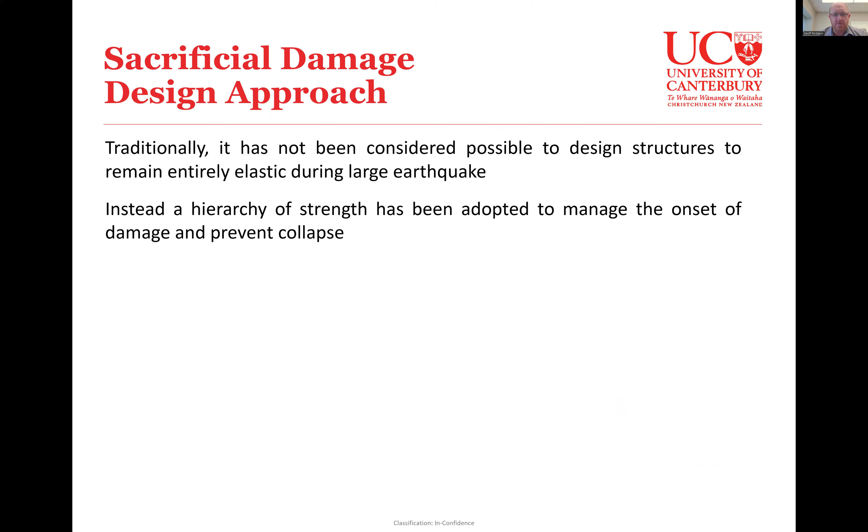We have traditionally adopted the sacrificial design approach. It's been used fairly widely worldwide, really based on the hierarchy of strength, capacity design, and protecting the columns through the formation of a hinge in the beams—something I'm sure you're all well aware of.

But certainly in the wake of the earthquakes in Christchurch, when you had engineers going to the media and doing interviews saying that this is the type of damage we would expect to see in an earthquake, that gave the public cause for concern. It's very clear there's a significant disparity between the way we've traditionally designed buildings and what the public actually expects of the performance of their infrastructure.

Separate to what I'm talking about today, there's also a separate project, funded by our state earthquake insurer in New Zealand, Natural Hazards Commission Toka Tū Ake, looking at society's perception and expectations of building performance. That quantifies and supports this disparity between what the public expects from our buildings and what we tend to actually be offering in a lot of cases.

This was Christchurch a few years after the earthquake, so there's a significant amount of demolition there.

It was around about 40 billion New Zealand dollars, so about 25 billion US dollars. The city suffered from it - it's a city with a population of about 400,000. There are lots of things that contributed to this, insurance penetration and all sorts of contributing factors, but a significant amount of the CBD was demolished.

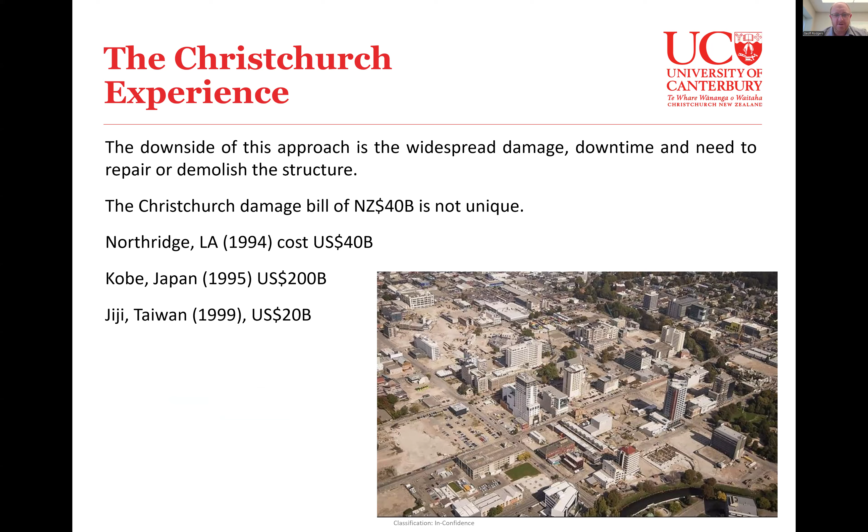So obviously the onset of damage and that sort of second response regime that occurs from sacrificial damage has a lot of advantages. It reduces the stiffness, lengthens the period of vibration, which then moves to generally a lower period of demand on the response spectra, reduces accelerations, and absorbs energy. But obviously the structure may not recenter, leading to significant downtime and cost.

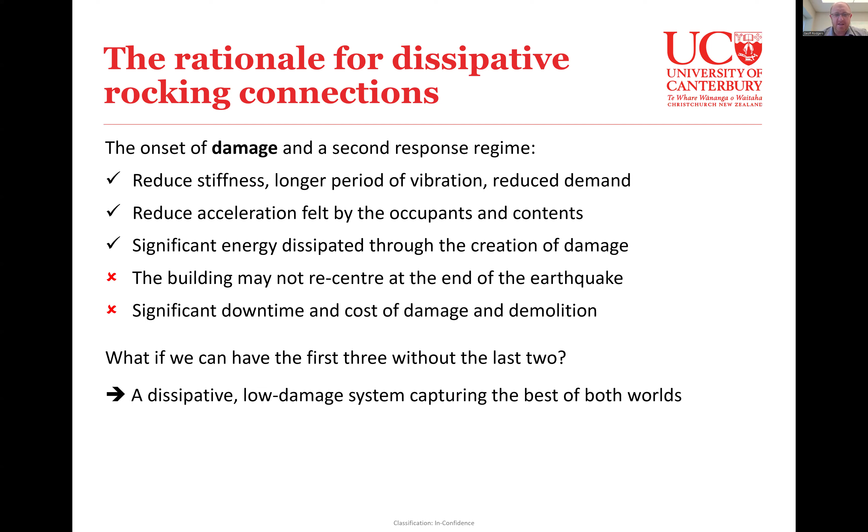So that has motivated a lot of work done in New Zealand and internationally around jointed rocking connections and the ability to provide, whether it be base isolation or like the PRESSS systems - the jointed precast concrete systems - really ways of providing some sort of controlled motion rather than through the formation of damage.

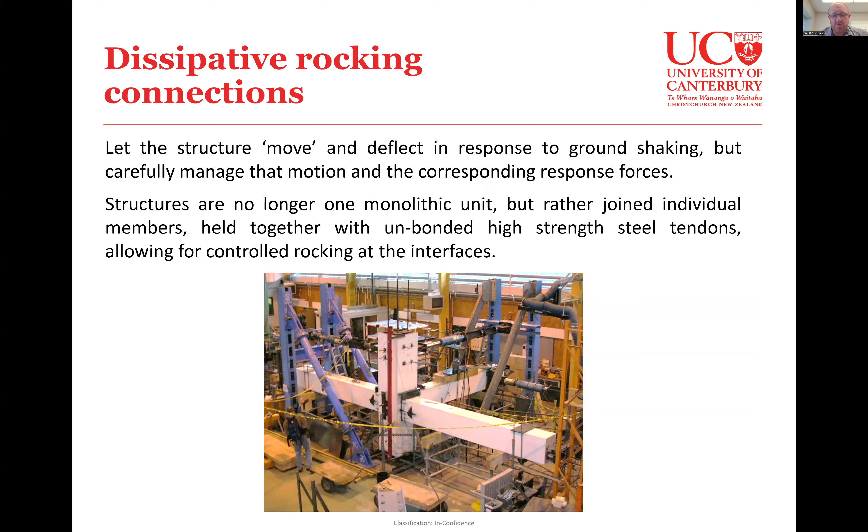So this was actually a large-scale structural test. It's just an external beam column joint that was used to simulate the connections, and this was actually part of my PhD - so this is going back nearly 20 years now. A small amount of gap opening occurred there, and obviously it has significant impact in terms of how the building interacts with the earthquake.

Now you can see, I'm sure if you can see my pointer, there is a steel tendon which is unbonded to the concrete, clamping everything together, and above a certain level of demand you have this rocking. Now this particular connection is what we refer to as a tearing solution, and it does have a frame dilation issue. If there was a floor slab that ran continuously across that, it would induce a dilation effect on that floor slab. So there are some continuity issues with that particular design.

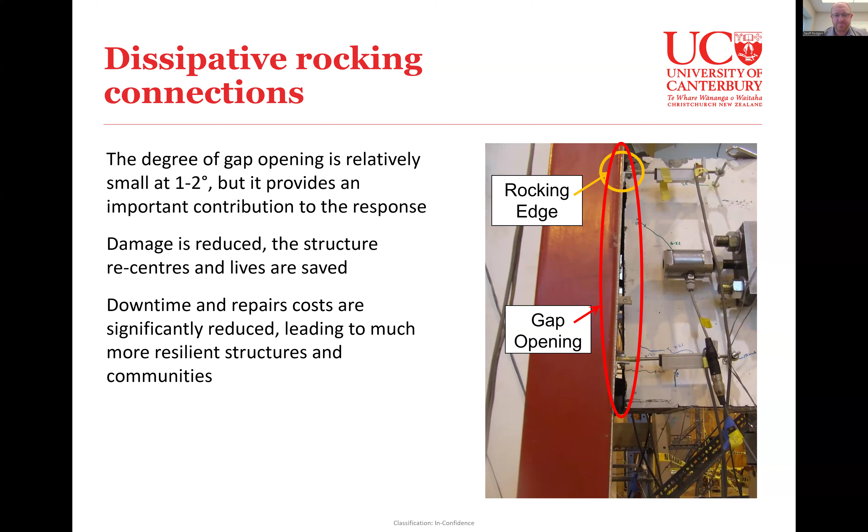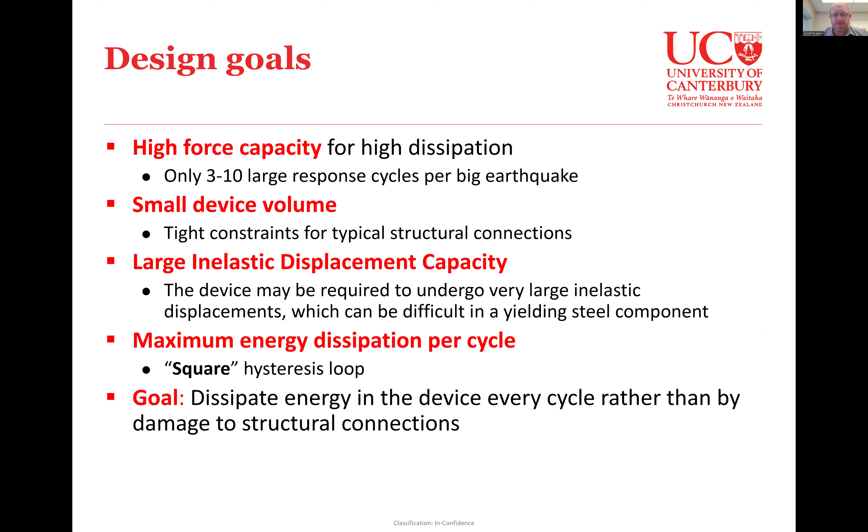And in that particular building and structural subassembly, what we looked at was a way of absorbing energy in that. So we wanted a high force capacity, a small device volume to fit directly into the jointed region. We wanted large inelastic displacement capacity, but we didn't want any stiffness or strength degradation or any low cycle fatigue concerns. So one thing we actually applied there was the concept of a lead extrusion damper.

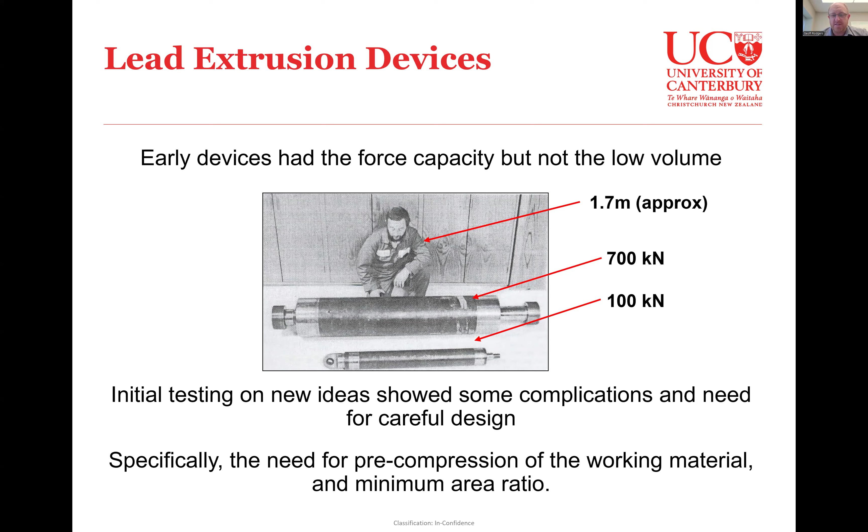So this is actually some photos from the 70s, and this was developed in New Zealand. It was the extrusion device, and these two devices - one was 700 kilonewtons, one 100 kilonewtons. They were quite long stroke devices for base isolation purposes.

And the principle behind them is that you have essentially either a bulged central shaft or a constricted outer tube. Regardless of how you do it, you're essentially creating an annular restriction, and you're plastically extruding a plug of solid lead backwards and forwards as you move the piston on the shaft relative to the outer cylinder. So much like making Play-Doh spaghetti, where you're extruding through that die, except you're doing it in a reversible way, and it's actually an annular orifice that you're using.

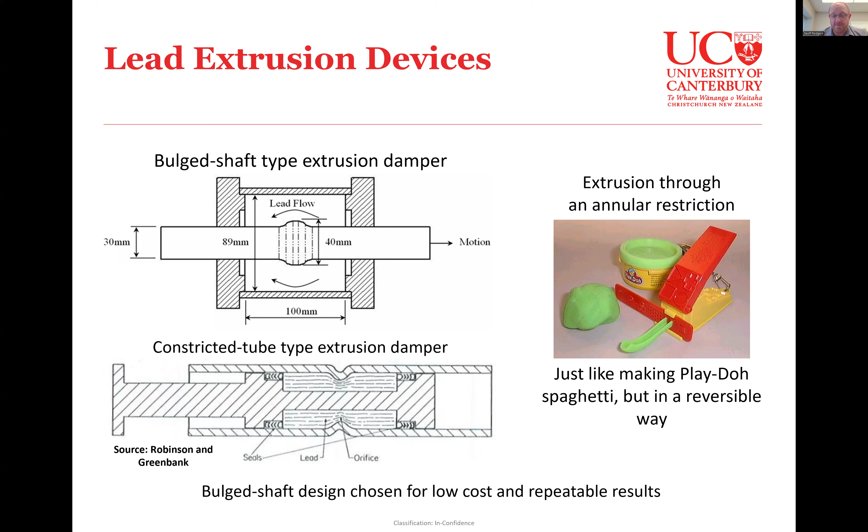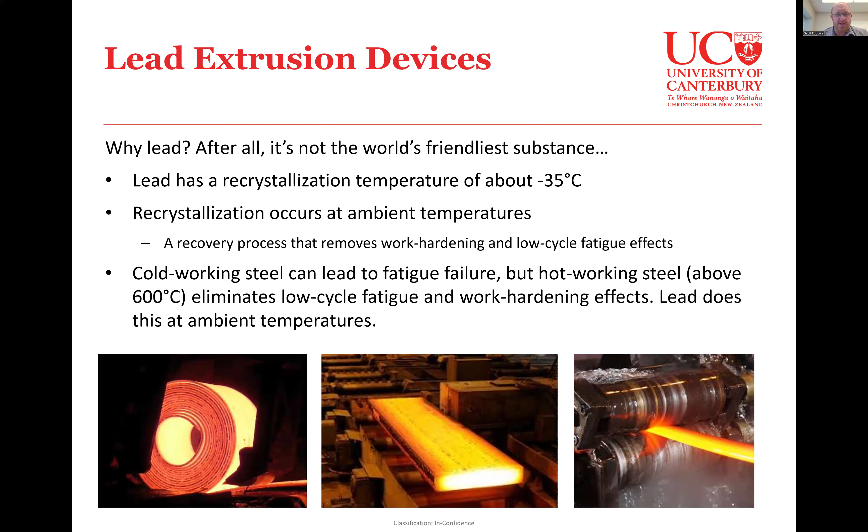So the question was, why do we use lead? It's not the world's friendliest substance - it obviously has some toxicity issues. Well, the key thing is that lead has a recrystallization temperature of about minus 35 Celsius. So when you're working this at ambient temperatures, it's essentially like hot working steel at 800 to 1,000 degrees Celsius - essentially you're not seeing any stiffness or strength degradation. The grain structure within the material is dynamically recovering, and that can all be done at room temperature, which is why lead has these unique rheological properties that make it a good candidate material.

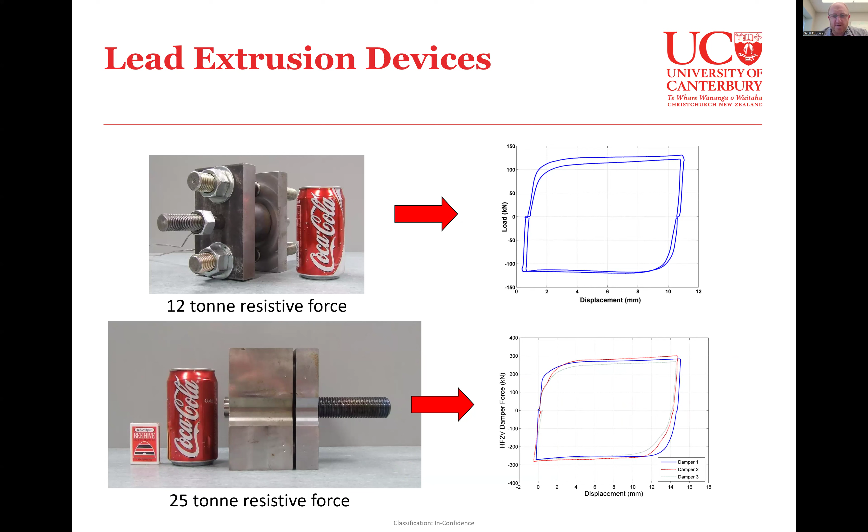So for those jointed connections, we made some devices here. They were 120 kilonewton - 12-ton resistive force in the top and 25-ton in the bottom. So when you put that in and pressurize the lead in there, you can actually get quite a significant amount of force capacity in a very small volume. So that's a very favorable aspect.

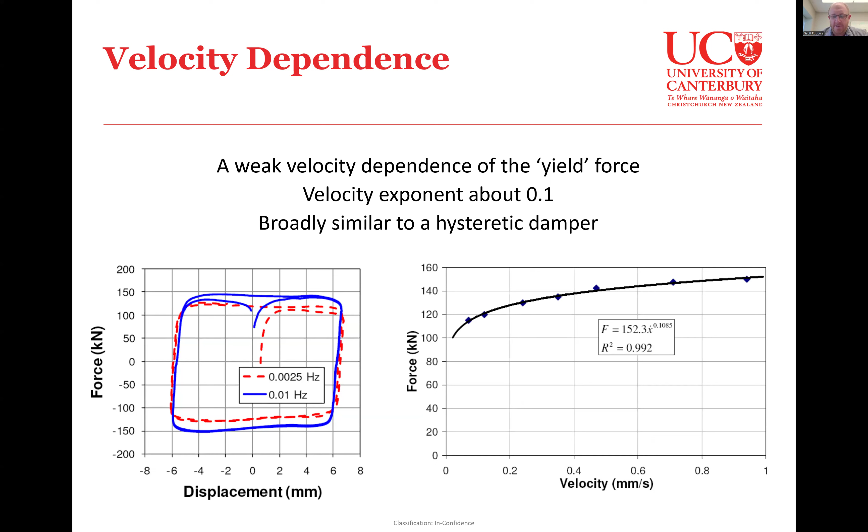The devices do have a slight velocity exponent, so they have a velocity dependence with a velocity exponent of about 0.1. In some ways they're broadly similar to a hysteretic damper, but they do have this sort of weak velocity dependence. Now with a velocity exponent of 0.1, there's not going to be a big force difference between two dynamic tests. But if you compare a quasi-static test to a dynamic test, which we have here, then there is a reasonable force difference. So what we have here is just the same device being tested in two different test machines - the inner blue loop was a quasi-static test, which was actually just a triangular wave.

The red loop was a dynamic test, which was actually a sine wave. While the force limit increases, the shape of the loop also changes, and that's traceable back to one being a triangular wave and one being a sine wave. So the blue one is essentially a constant velocity being put into it, and the red one is a varying velocity with displacement.

What you can see there is you're getting about 100 kilonewtons at 10 millimeters per minute, or about 0.16 millimeters per second, and then about 150 kilonewtons at 30 millimeters a second. So you're seeing about a 50% increase when you change this input velocity by about 160 times. So there is a velocity dependent component to these, but it is relatively weak.

Comparing a quasi-static to a dynamic test has quite a significant difference, but comparing between two quasi-static tests or between two dynamic tests is relatively minor changes.

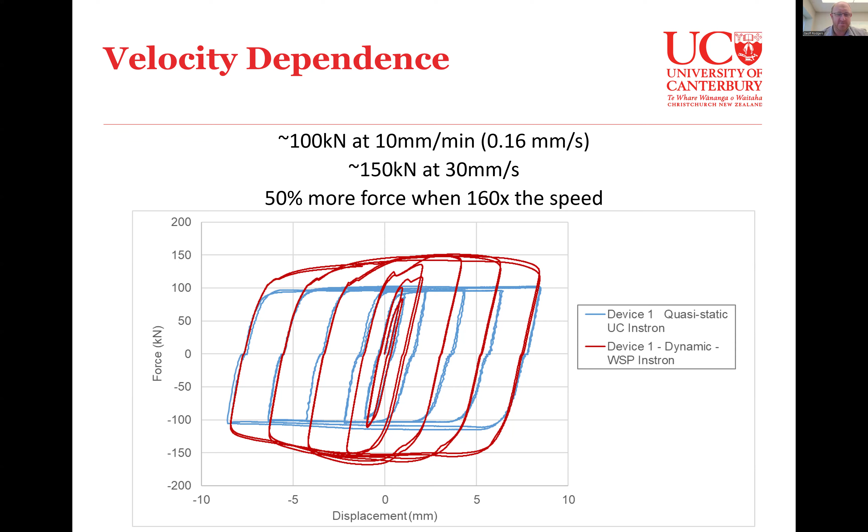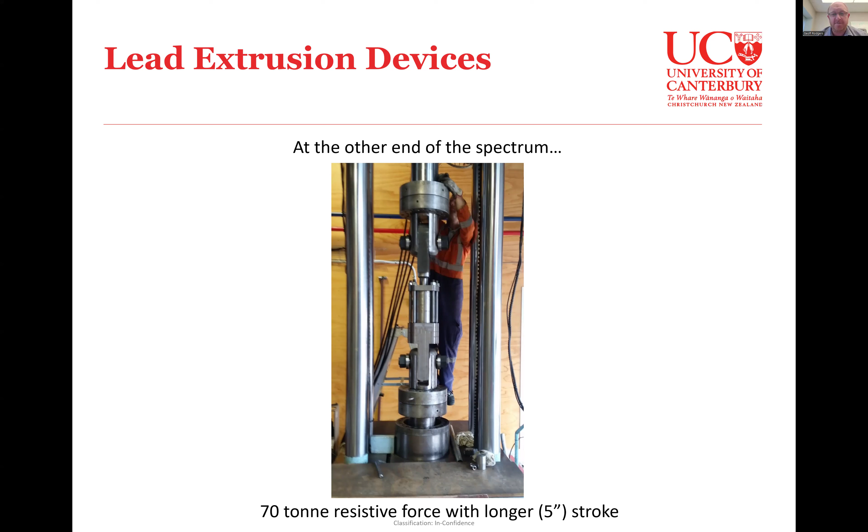Viscous fluid dampers, I'm sure you've all seen these — anything from a linear force velocity response to a nonlinear force velocity response, so they're fairly standard.

One thing we've also looked at is Ringfeder friction springs. These are an alternating taper — when you put an axial compression onto the stack of springs, the outer rings undergo a radial expansion, and the inner rings undergo a radial compression. In doing so, you get a very, very high stiffness spring. So you're turning this axial force into a radial reaction, and the stiffness of these springs can be orders of magnitude higher than you'd get from something like a coil spring. While coil springs are very useful for mechanical plant, they don't tend to have the stiffness useful on a structural scale — they don't have the ability to get the forces we need. That's why these are a favorable option.

Now, one thing we've done is look at a device here which is a combination of these. Looking at the diagram, the tube that sticks out on the right-hand side has ring springs located within it. It might look like it's in series, but those two elements are actually in parallel — they undergo the same displacement, and the forces in the two damping components, the viscous fluid component and the ring springs, actually add together to generate the total damping force.

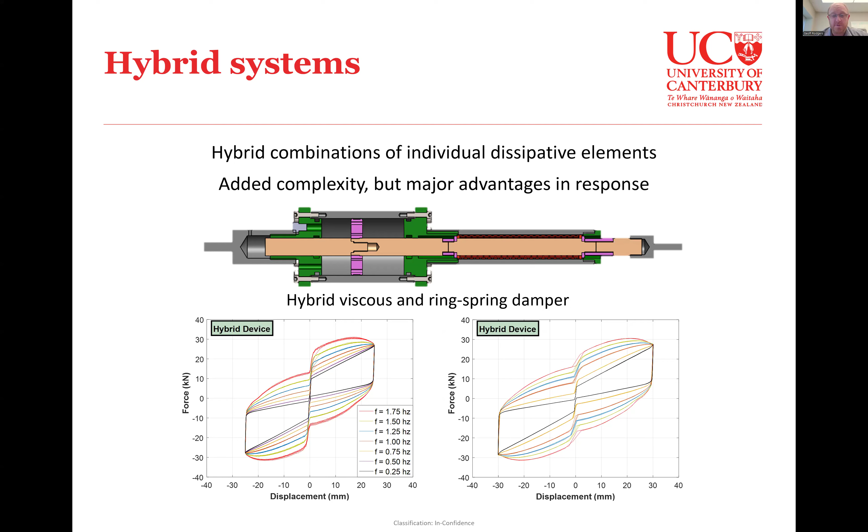So this is the device that results, and as you can see, as you go faster and faster, you get a much broader loop, and as you go slower and slower, you just revert back to the ring spring behavior as you saw on the previous page.

Another thing we've done is looking at custom quadrant damping. This is sort of born out of a lot of the semi-active device work, the resettable stiffness devices and the magneto and electrorheological devices. There's a huge body of work that's been done there, and I've actually worked previously on some resettable air dampers.

But the key thing is that the semi-active devices do have some complexity to them. So the question was, can we achieve that same broad type of behavior, but do it in an entirely passive way? So we don't have to have any computation, any sensors, any power requirement — we've just got a passive device that will produce that behavior.

The idea is that damping in specific quadrants of the force deflection plot may mean that we can provide damping to a structure without leading to an increase in the overall base shear. So in terms of peak axial forces in columns and the demand on the foundation, this has a potential advantage here.

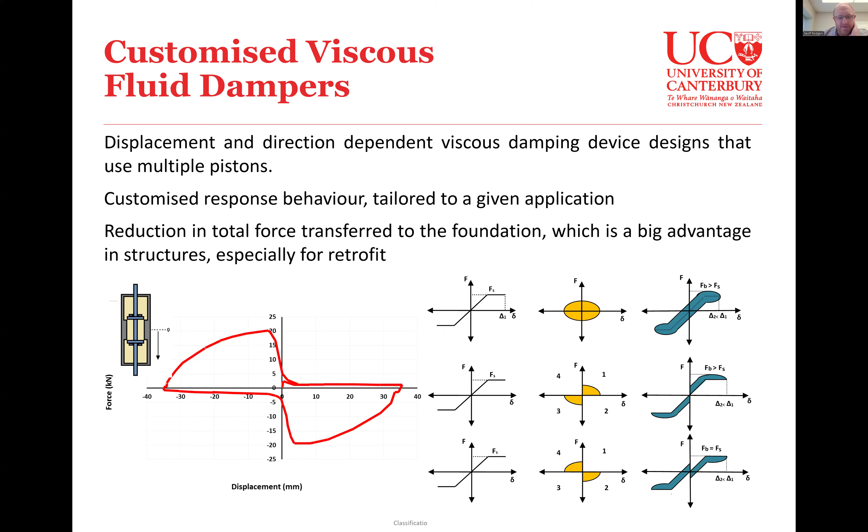This is the schematic for a linear elastic structure. The previous slide showed a bilinear elastic structure, which you might see for a rocking structure. If you've damped something to the point that you're largely within the linear elastic range, the idea is that you can reduce your displacements without increasing base shear. Depending how much you reduce structural displacements, you may see less total base shear in other cases too, which would further reduce the combined demand on the foundation.

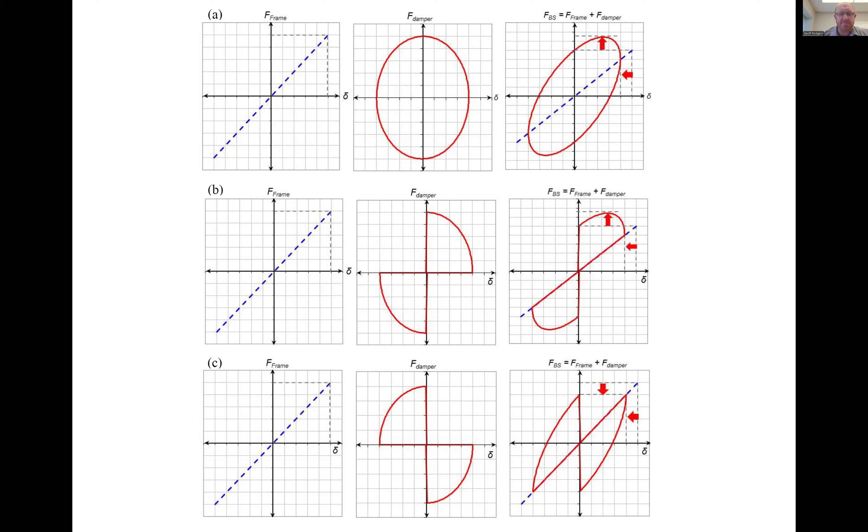So the question is how to achieve that. We've got a standard viscous damper fitted within a cylinder, so that's what that might look like. The first thing we did was put essentially a plate which covered some small inner orifices in the piston, and then a much larger ring around the outside with much larger orifices.

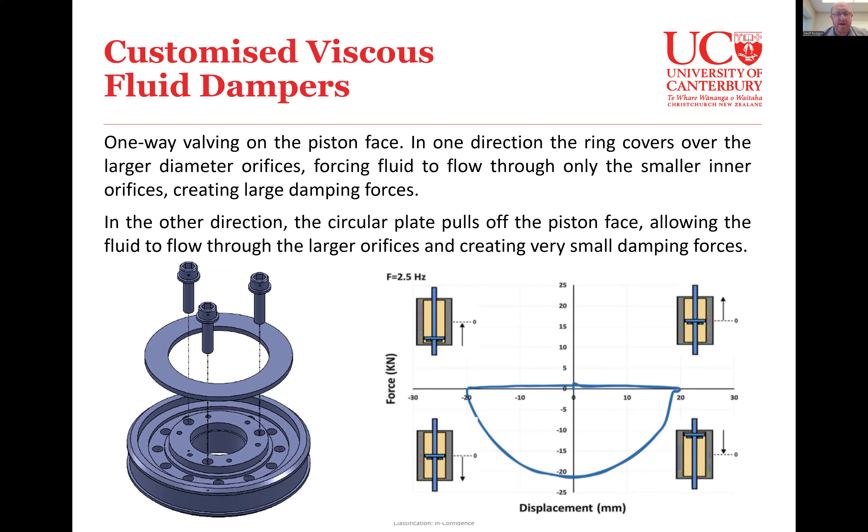We have this one-way valve, which is just a large circular washer that closes those larger orifices. When pushing in one direction, the washer closes down and closes off those larger outer orifices. But turning in the opposite direction, that washer lifts off the outer ring, giving a much more open fluid path, so you get very little damping. This gives you half of the deflection plot - basically half of the damping behavior you'd see from a conventional viscous damper.

The other thing we can do is actually taper the cylinder of the device. As the piston moves through the narrower part of the cylinder, it produces damping forces. But as we move to the wider part, there's an alternate fluid path around the outside of the piston, between the piston and the cylinder - an annular gap.

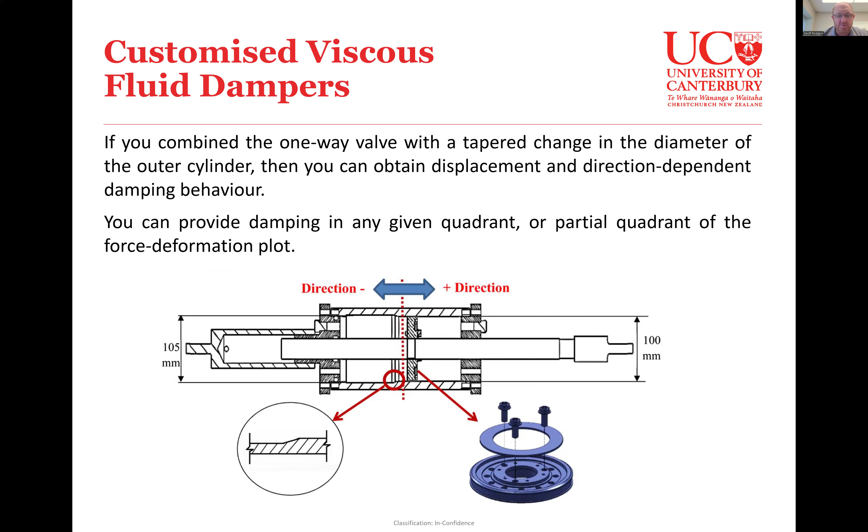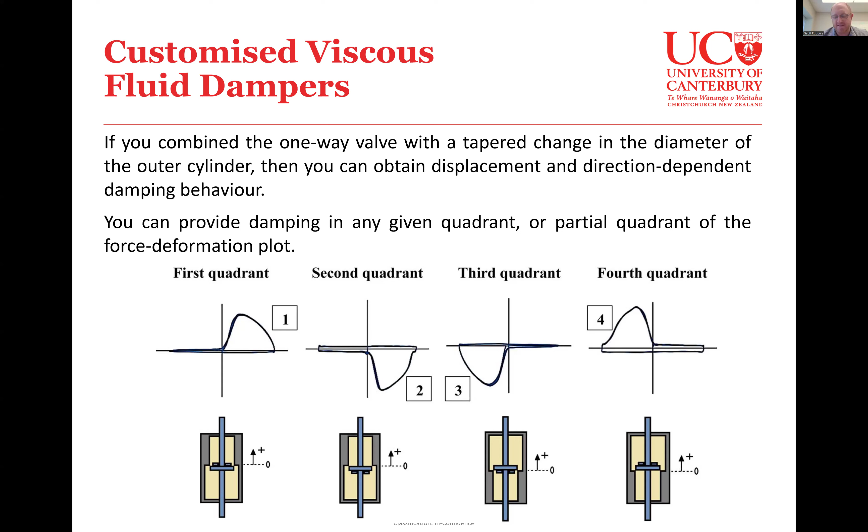The next thing was to try and say, we don't necessarily want one quadrant, we might want two of the opposing diagonals. In that case, what we have is actually two pistons with one-way valves, positioned back to back, which slide initially through a narrower central section of the cylinder and then pass into a wider section. Together, that gives this off-diagonal damping to the quadrants.

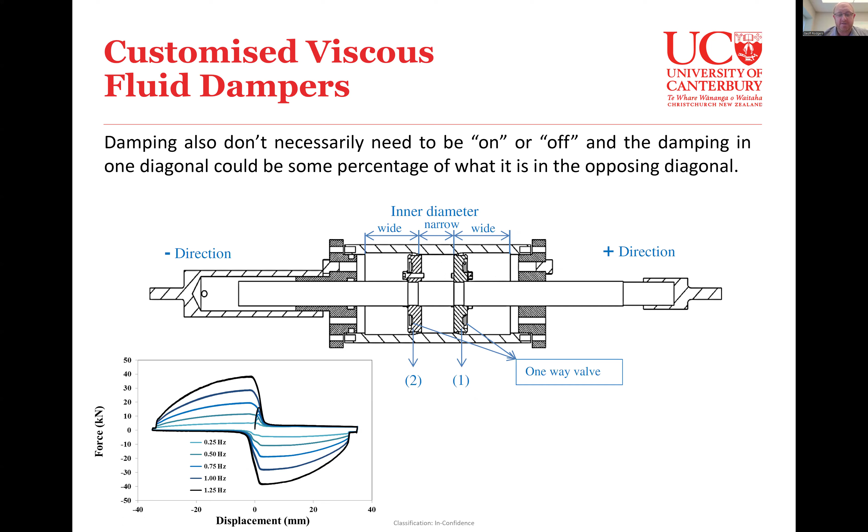Initially, as we move out this way, this piston is in the narrow part of the cylinder, but the one-way valve is open. When we reach peak displacement and start going back, the one-way valve closes, and the piston, initially in the narrower part, produces damping through that quadrant. Then as we pass the nominal zero position, that piston with the closed one-way valve passes into the larger part of the cylinder, and the damping force drops away.

We've also looked at some tension-only bracing, just looking at different engagement mechanisms. In this case, it was a yielding steel fuse as the dissipator, as a way of absorbing energy on a rocking wall when you've got uplift, but no residual compressive forces, so you don't offset the restoring force from either gravity or post-tensioning within a rocking wall.

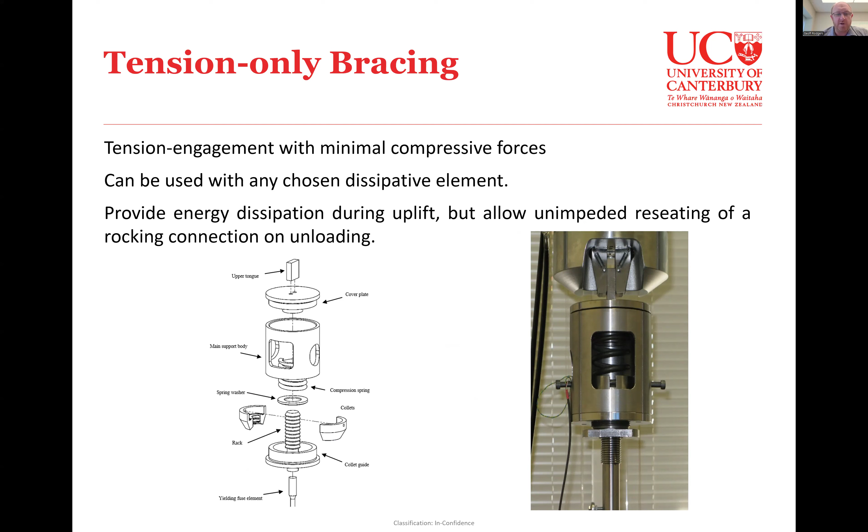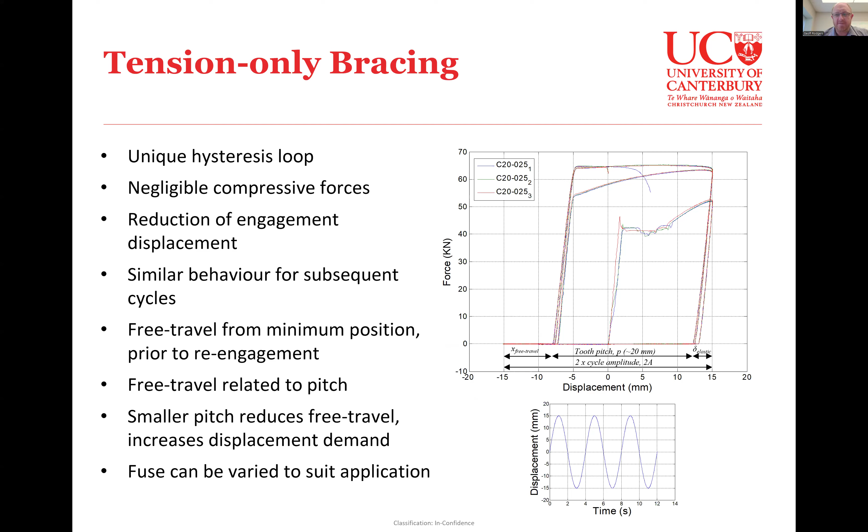When we test that, because it was a yielding steel dissipative element, we end up with this piecewise monotonic behavior. You can compare here - the greeny-grey line is essentially the piecewise monotonic behavior of the fuse, and the blue line is the observed system response, where every time you ratchet, you reset the zero displacement datum, giving you the more compact loop there.

So it's just a way of providing fairly immediate resistance on uplift and not having to overcome elastic deformations or residual compressive forces.

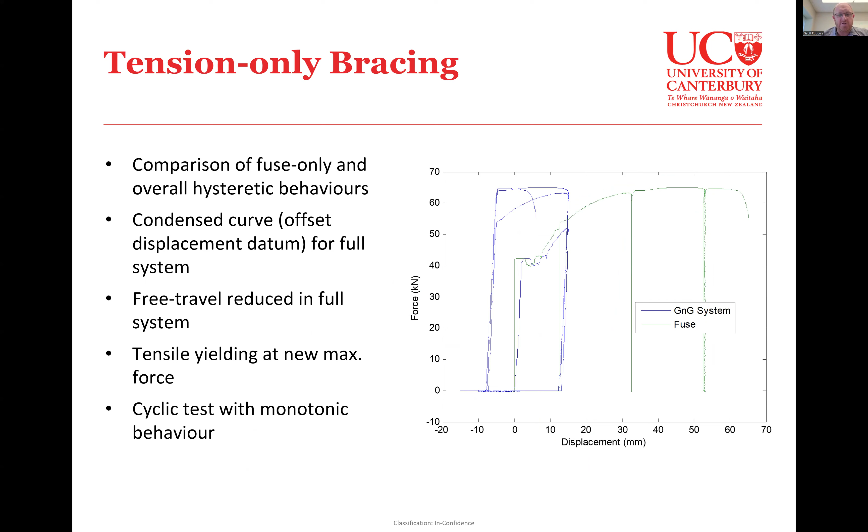Another project I've looked at, with the University of British Columbia in Vancouver, was a lead extrusion device incorporated into essentially a telescoping brace. It looks externally a bit like a BRB, but you've got a lead extrusion device in there, which means you can tune stiffness independently of strength, since you can size the steel components independently.

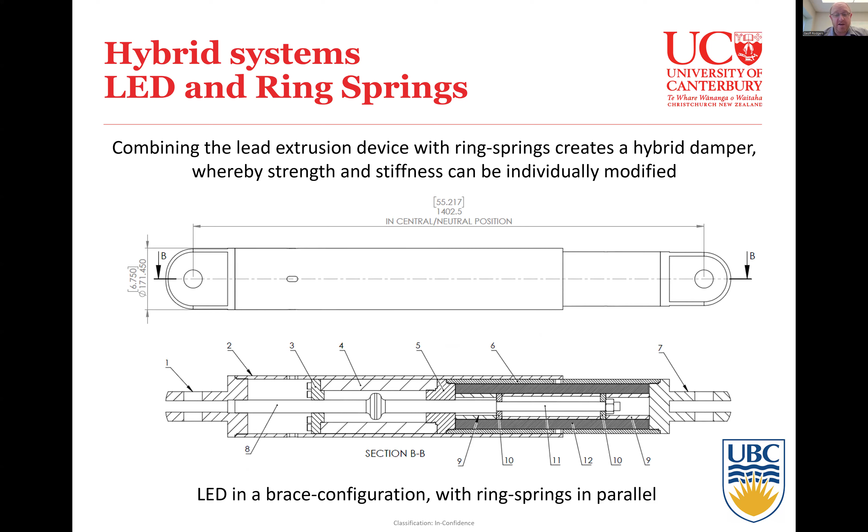Of the bulge, which dictates the resistive force during loading. We also looked at putting ring springs into the open cavity within the tail of the device to provide a small amount of restoring force. This wasn't about providing an overall recentering capability, since the size of ring springs needed would be very large relative to the forces in the lead device.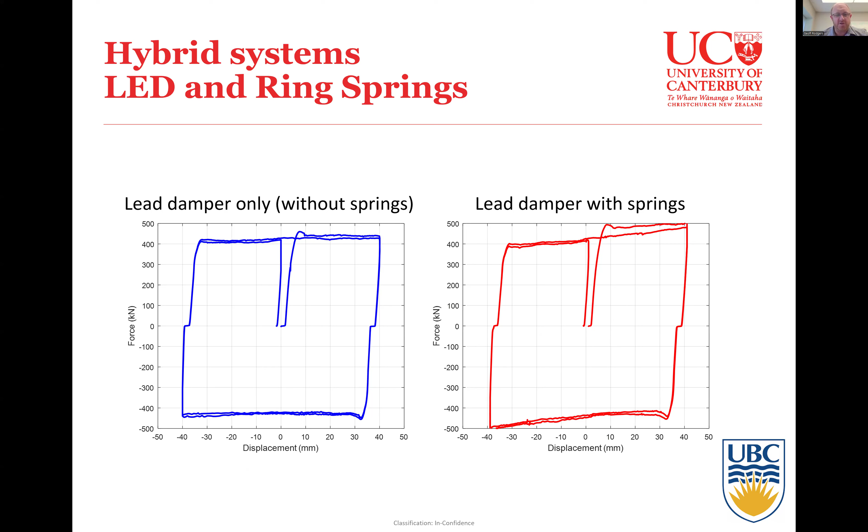But the key thing is it enabled us to tune the post-yield stiffness, in this experimental setup. We have a yield stiffness defined by the bulge size in the lead device, and a post-yield stiffness dictated by the particular ring springs used. So that was a way of tuning and customizing the response behavior.

So a few things we've done, like this bit on rocking connections - we're actually embedding the lead extrusion device within the end zone of a beam column connection. Rather than having an external device, this was embedded and cast into a cast-in-situ closure pour. There were still separate jointed connections, so this wasn't a monolithic solution. It was a precast beam and precast column that came together with a cast-in-situ closure pour at the end of the beam, so you could connect everything up, and the final joint just looks like a standard connection.

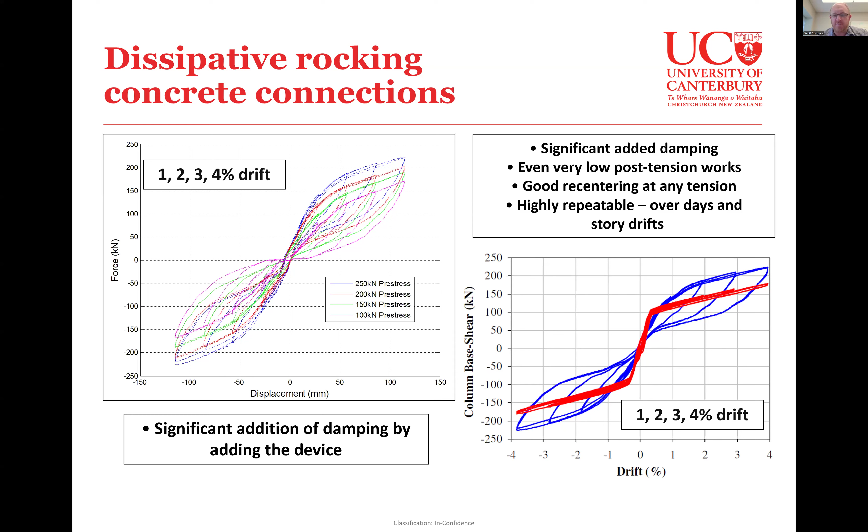It's just got some displacement gauges mounted there. As we tuned the clamping force provided by the post-tensioning, we got four different results. After quite a few tests, we opened up the joint, cut off the damper connection, and got the baseline result for different drift levels. So this was a parametric study with and without damping, and with different levels of post-tensioning within the connection. We also did increasing and decreasing drifts.

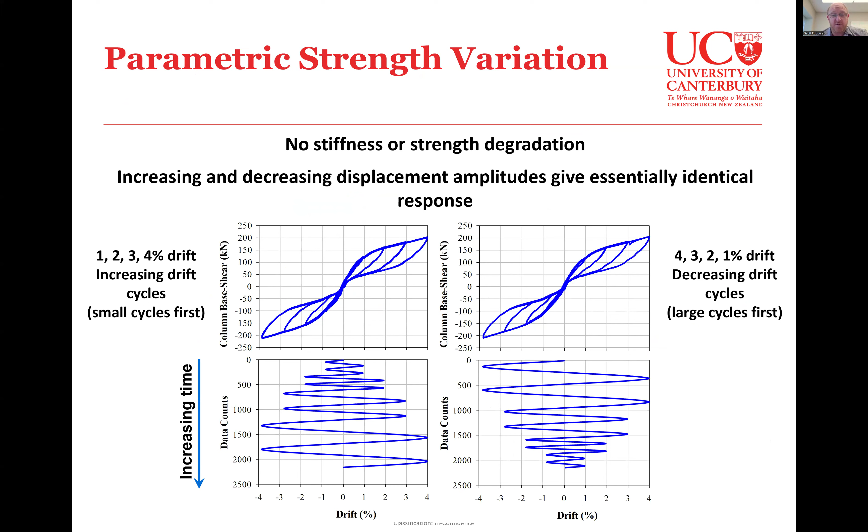We essentially saw largely the same response - doing the big cycles first rather than the small cycles didn't really change the overall response of that connection.

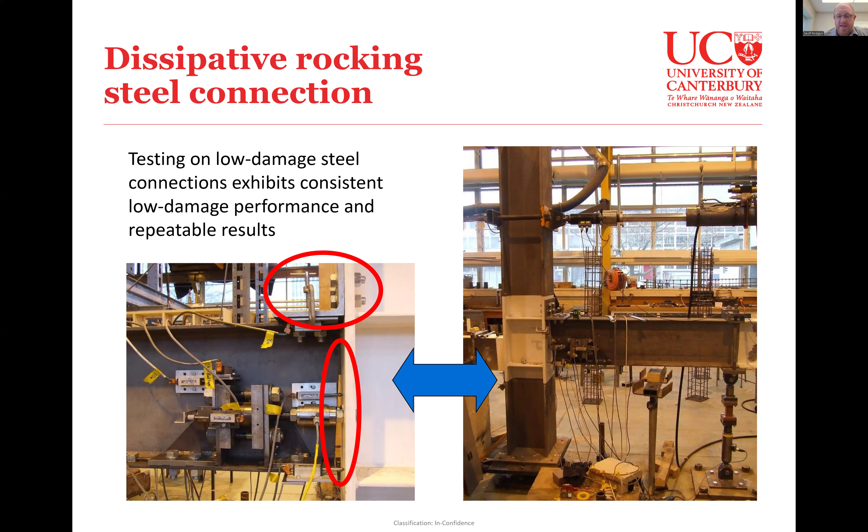We also tried a steel connection - a top-hung beam column joint where the top angle provided a pivot point, and we used the damper to form an overall moment connection. There should be a video of this - it was a quasi-static test, sped up here. The damper sits below the bottom flange and provides the overall moment connection.

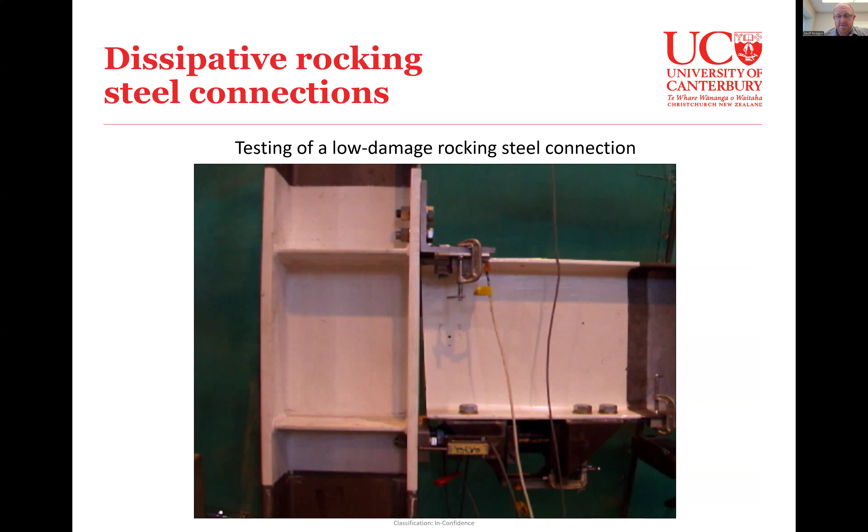We tried a few different configurations with different numbers of devices in different locations, but essentially got a fairly reliable response - two fully reversed cycles at every drift level. We got a pretty consistent elastoplastic response, but without any damage to the steel structural components, so it was quite a good low damage steel connection.

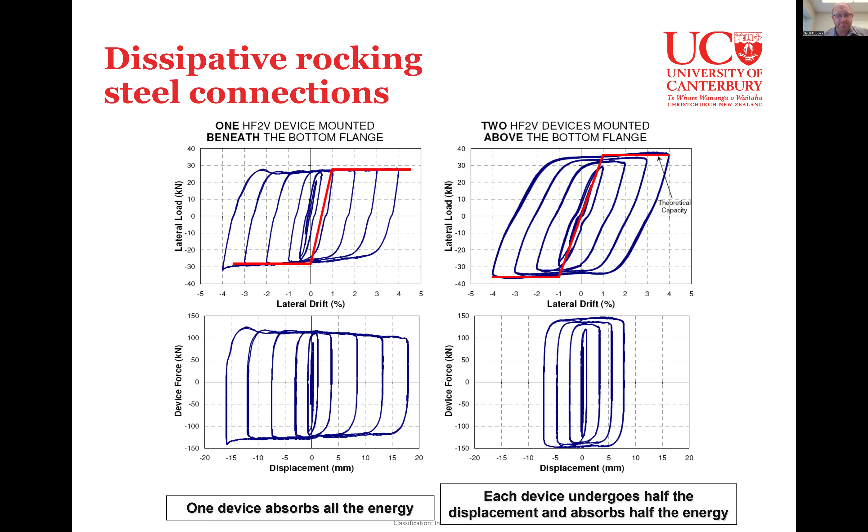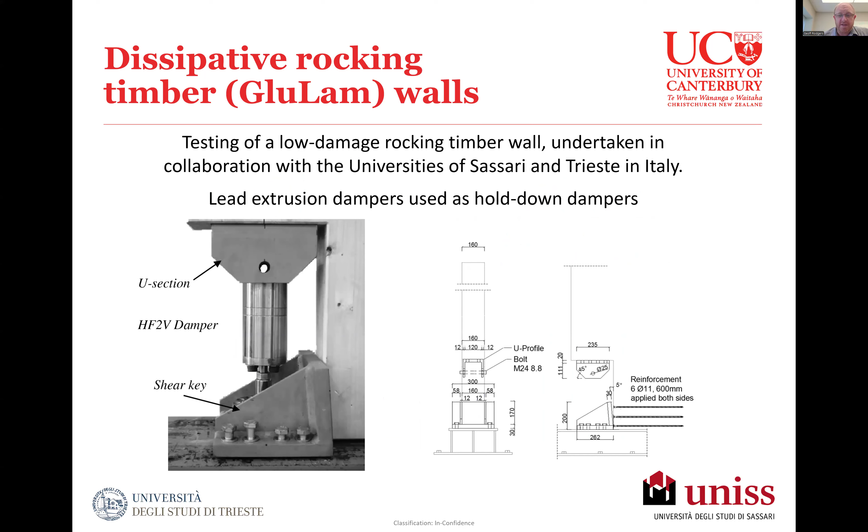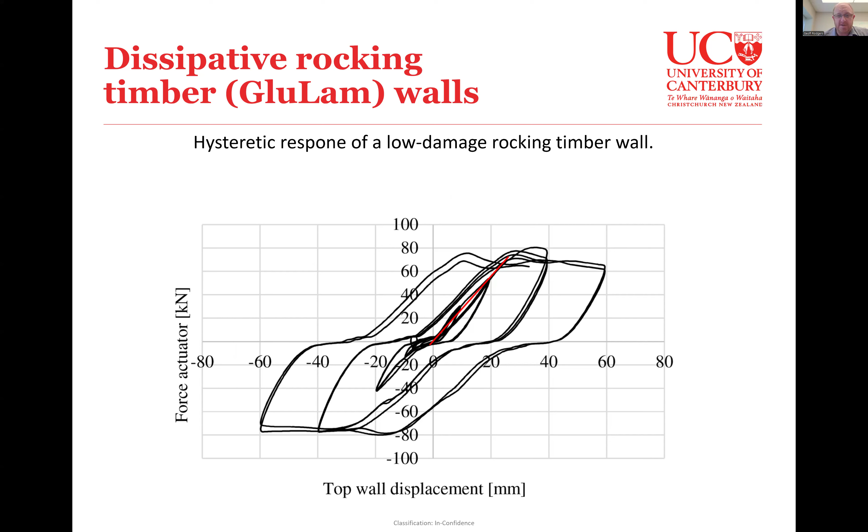We've also previously tried incorporating lead extrusion devices into a rocking glulam or mass timber wall, where the devices acted as hold-downs between the wall and foundation. This was the test in the lab, and this is the overall response - a bit more flexibility given the nature of the timber, but actually quite a good overall result.

I want to talk about some system-level dynamic shake table tests we've done with this technology. I've been fortunate to be involved in three different tests that occurred in the same test lab here in China - the Tongji University labs, in the earthquake engineering test hall on the Jiading campus in northwest Shanghai.

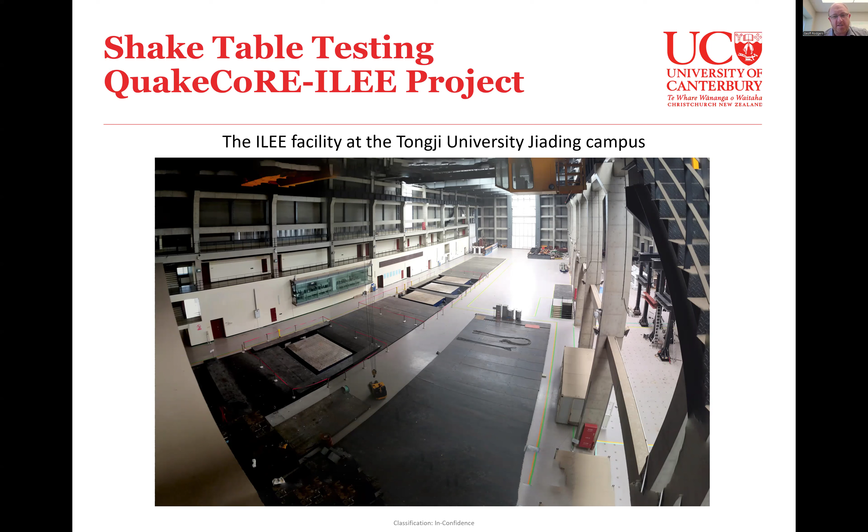It's actually primarily a bridge lab, with a long trench that the four shake tables sit in, so you can set them up under bridge piers for dynamic bridge tests. But you can also put the tables together and use them as a combined shake table to support a building, which is what we've done.

So this was the building, a project with a number of collaborators - Rick Henry at the University of Auckland, Ichu Lu, who was at University of Auckland at the time and is now a faculty member at Tongji, and Professor Ying Zhou at Tongji.

The idea is that in the longitudinal direction we have a reinforced concrete rocking wall, post-tensioned to the foundation, linked into the floors through a flexible link slab. In the transverse direction we have a different mechanism - the wall is vertically isolated from the structure, with no uplift of the beams or flooring as the wall rocks.

But in the longitudinal direction, because they are integrated, the rocking wall actually uplifts the floor through that link slab as it rocks. So we used longitudinally hung double T concrete on the first floor, and then we used transverse metal tray of the ComFlor, the composite steel tray, for the flooring in the upper level.

So there's a couple of different design configurations. One was to provide 10% damping and have 1% design drift. The other one was to have 5% damping and a 2% design drift. That was tweaked by modifying the post-tensioning and the amount of energy dissipation. So both the strength and energy dissipation and damping were provided through that system.

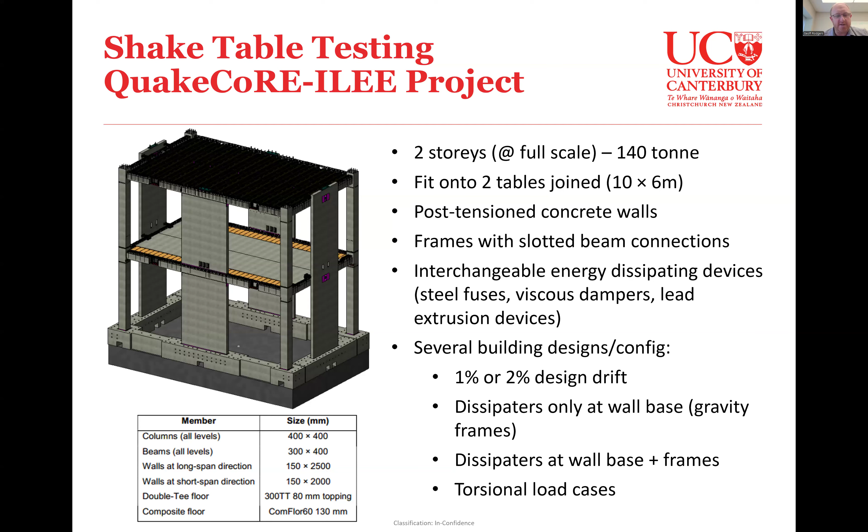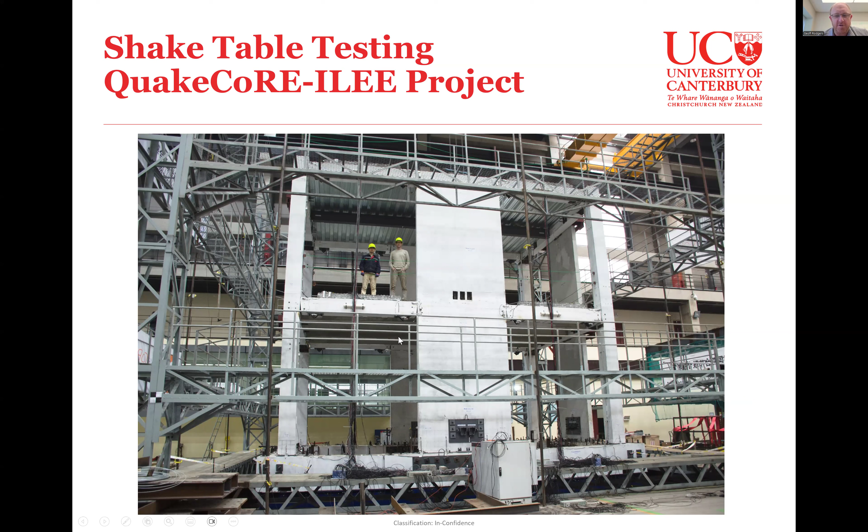For the beam column connections in the structure, we actually used a design that was developed, called the slotted beam connection. It was developed primarily by Des Bull. He's essentially an adjunct professor of concrete design at the University of Canterbury. He's also a practicing structural engineer.

The idea is that there's essentially a hinge point up here, and the beam is actually cut back here to allow both positive and negative joint rotations, but to do so in a way that doesn't create frame dilation, so there's no dilation of the columns and no tearing or displacement compatibility issues induced within the flooring unit. So that's a key difference from the connection that was developed before.

In this situation, we had a few different configurations and design situations. In this particular case, we have the yielding steel fuse - essentially like a scaled down mini BRB. We also had a configuration where we put a lead extrusion device in here as a means of forming that moment connection, sort of the equivalent of the steel connection video I showed you previously. So that's the connection there with the lead extrusion device mounted, and you can see the cutback in the beam.

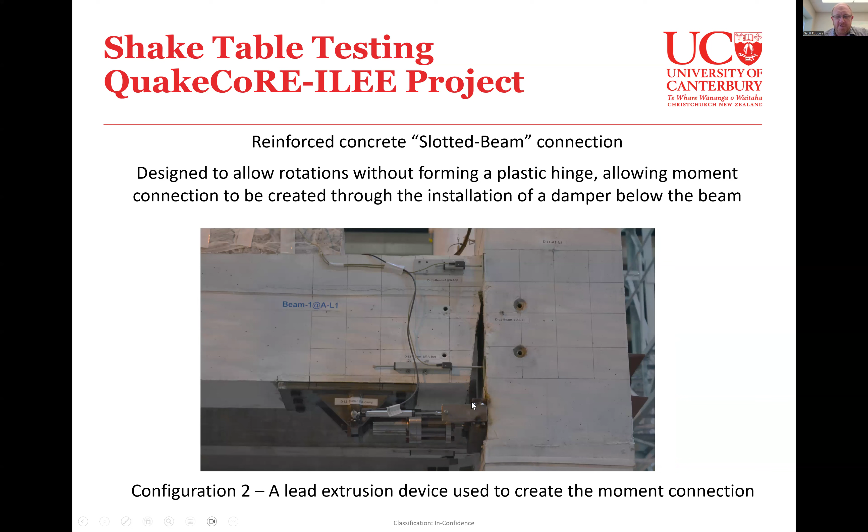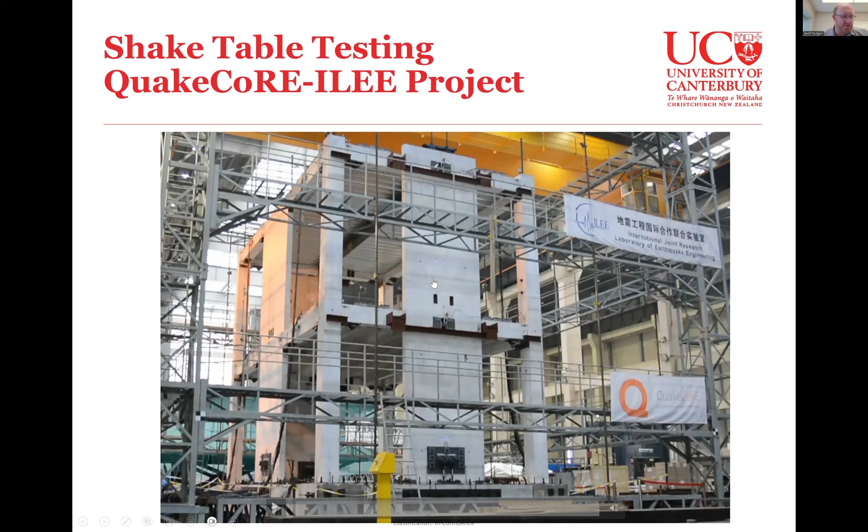So this was the structure being tested, about 9 meters tall, with a 10 meter by 6 meter footprint. This is just a video of the testing. You can see people here at the left-hand side and right-hand side. It's a pretty big test. Let me just show the video here.

This is just a different view of a shake. This was actually in the design 2 configuration where we had slightly less damping, a 2% design drift target, and this was at MCE level.

This was actually three of the viscous dampers that were mounted into the longitudinal wall - sorry, this is actually the transverse wall. In the longitudinal direction, we had a more lightly armored wall, and it actually sat on top of the foundation. In the transverse direction, the wall was actually recessed into a tapered steel pocket to provide shear resistance. This is just the localized view of the viscous dampers operating as the wall uplifts.

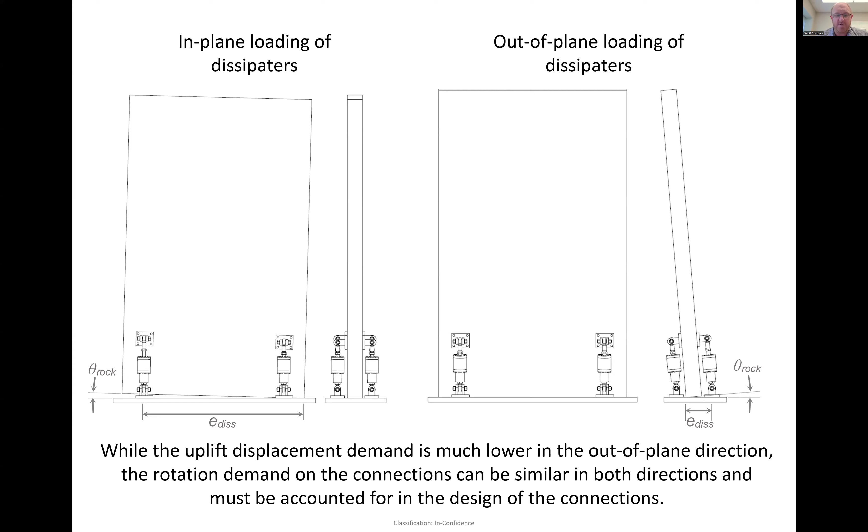But because the viscous dampers are much more rigid relative to the loads they carry, it would be inducing significant prying effects and other unintended demands on those dampers if we didn't have the spherical connections there. This was the rigidly mounted steel fuses in the wall base.

A little bit of damage on the wall there, just a little bit of spalling at the wall toe. That was after about 38 different earthquakes that we'd put the structure through. So it wasn't actually looking too bad given the cumulative demand it had been subjected to.

This is actually a video of the interior of the first elevated floor of the building. What's highlighted in red there is essentially the area covered by the link slab, so that the double T's stop short of the wall, and then there's just the link slab, which is the topping component, that goes through, connects in, and provides diaphragm action into the wall, but can separate from the double T so we don't over constrain things. There's definitely some cracking on that floor, but nothing of significance.

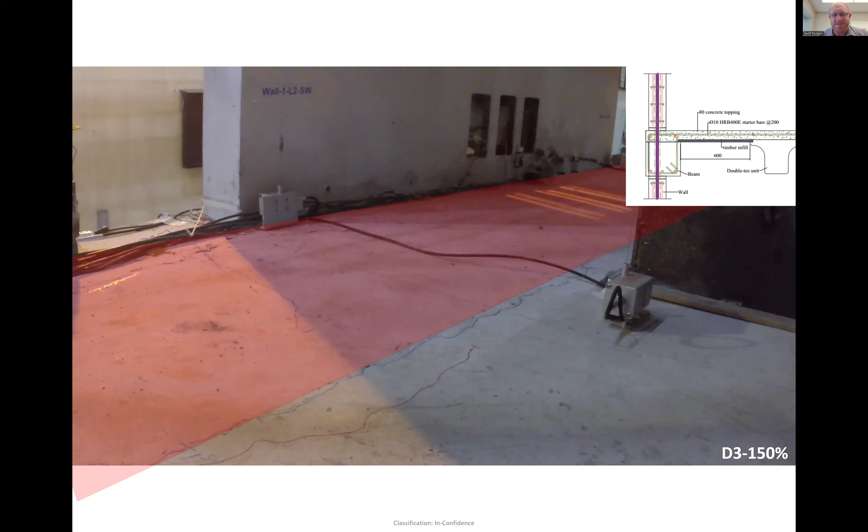This is actually a video which shows the demand on that floor quite dramatically. So while there is quite a lot of out-of-plane compatibility displacement demand in there, by just designing in some flexibility in the out-of-plane direction, that actually results in some pretty good behavior.

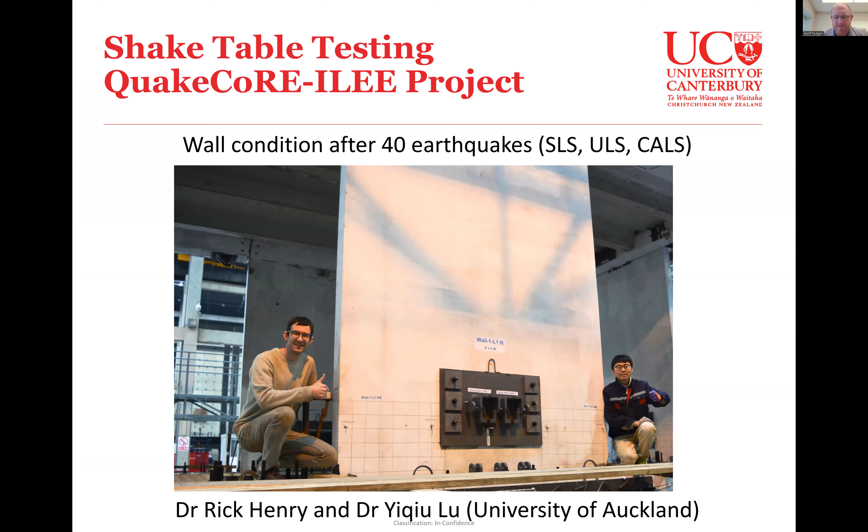This was Rick and Yiqiu after the end of the testing. Pretty happy with the building. And then one thing that we did towards the end, this is sort of a focus for me, and I'm biased because this is my area of interest and passion.

But the last thing we did was we took all the energy dissipation out of the building, and we just shook that as hard as we could. There's a few reasons for doing this. The main one was to try and get as much displacement demand as possible.

So we'd gone up to about 2% drift. This was because we'd already reached the overturning moment capacity of the table. The table had actually shut down - the control system had shut down the table on one of the tests. So this was one way of getting more displacement demand into the structure, without being able to increase the shaking intensity we subjected it to.

So we subjected it to a bidirectional test, and we got up to just below 3% drift in the building. This one, as well as having a larger drift, also has no energy dissipation incorporated into it.

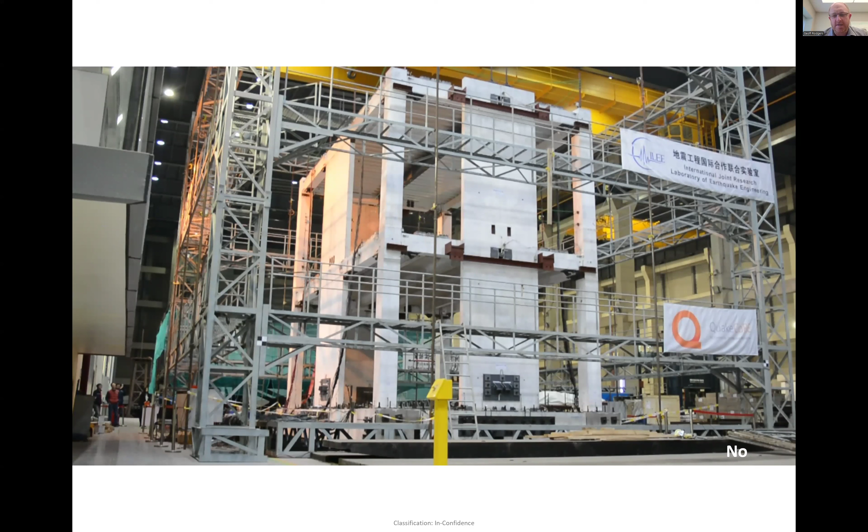So while the energy dissipation is a relatively small part of the structure in terms of size and mass, it did have a significant impact on the result, both in terms of a larger peak drift and then a much longer shakedown at the end.

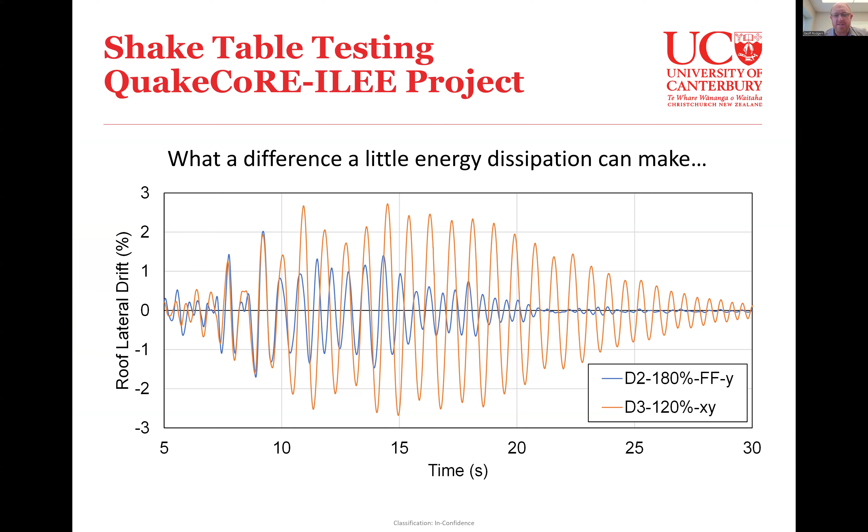So if we plot the displacement traces for the same building, design two is actually subjected to a higher demand motion and then a lower demand for design three. But you can see there the peak displacement is larger, and then the shakedown, the duration to come back to rest, was much longer.

I was also fortunate to be involved in what was referred to as the RoBuSt project. So this was a low damage steel frame. There were a number of different connections and configurations tested - it was a very complicated building to accommodate a lot of different tests and design configurations. But the one I was particularly interested in was the rocking frame in the transverse direction.

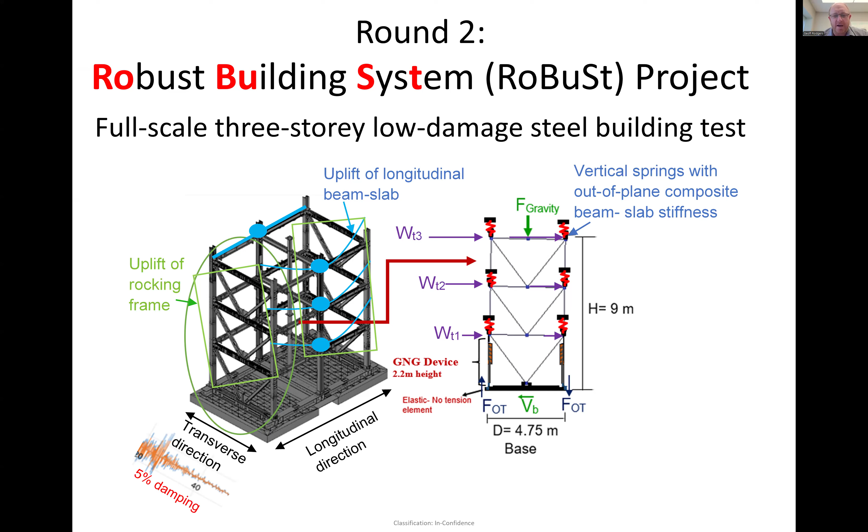So you had two rocking frames at each end, and then we had a tension-only dissipative element on each side of each wall, and that provided resistance. It was a ratcheting engagement mechanism and a sliding friction element to provide energy dissipation.

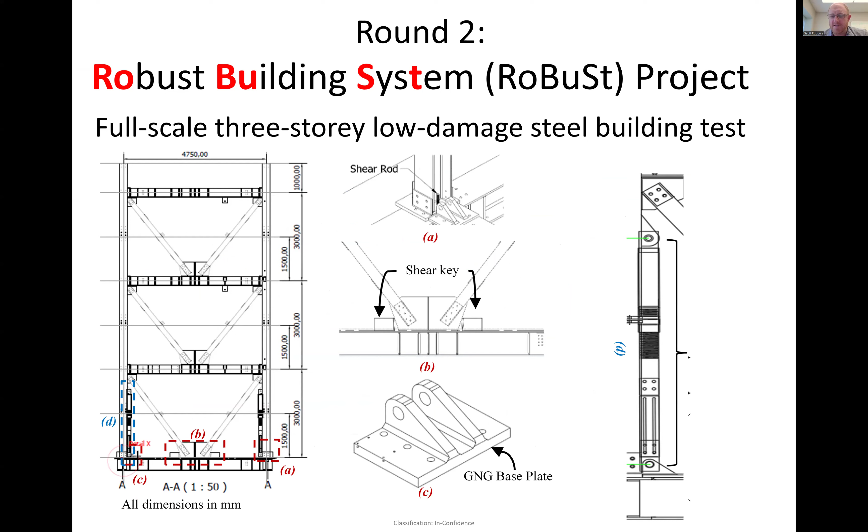So this was some of the details we had. Essentially, this is what we sometimes refer to as the grip and grab device. There was the tension component on the right there, the ratcheting engagement mechanism at the top, and the sliding friction component at the bottom. You have the rocking frame, and then this was some component testing we did on that device.

This was component testing at the University of Auckland in the middle of 2022, just to prove the device worked before we put it into the large shake table test.

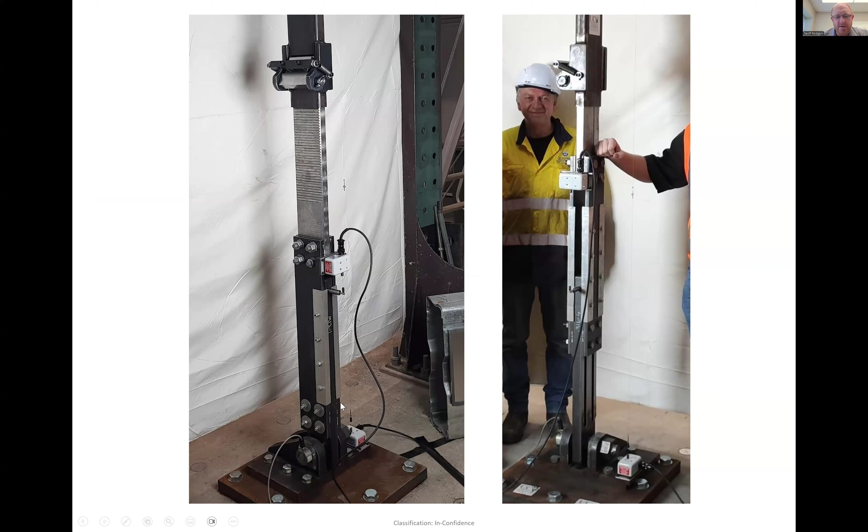So there's essentially a toothed rack, a piece of steel with some teeth cut into it and then a ratcheting mechanism. And then this was the sliding friction component at the bottom. So this was the actual full scale test.

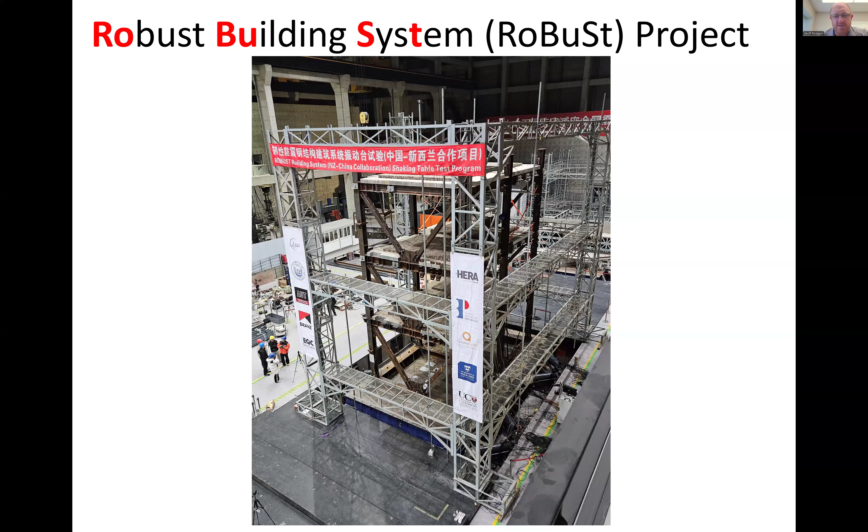Similar shake table, same facility as the previous test, but this was about a 10 meter by 6 meter footprint. It was a little taller because it was a 3-story structure, but had a slightly lower interstory height. The third test, which finished in January of this year, was a scaled down high-rise test - a coupled rocking core wall with outriggers, with energy dissipation devices mounted within the outriggers and within the wall base.

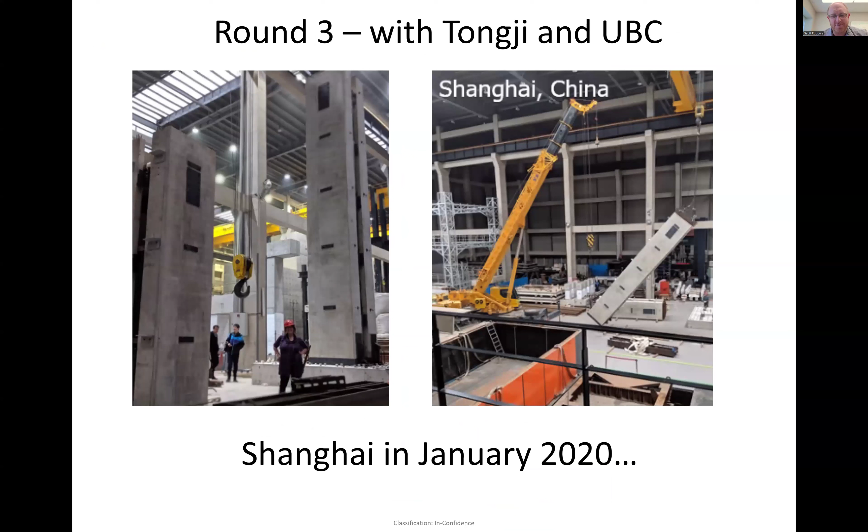This test was set up in January of 2020, and we were well advanced with the planning, planning to test a few months later. Of course, the pandemic hit and put things on hold. So we fast forward 5 years after the pandemic passed, we managed to resurrect the project, got it onto the shake table, and this is an example of that testing.

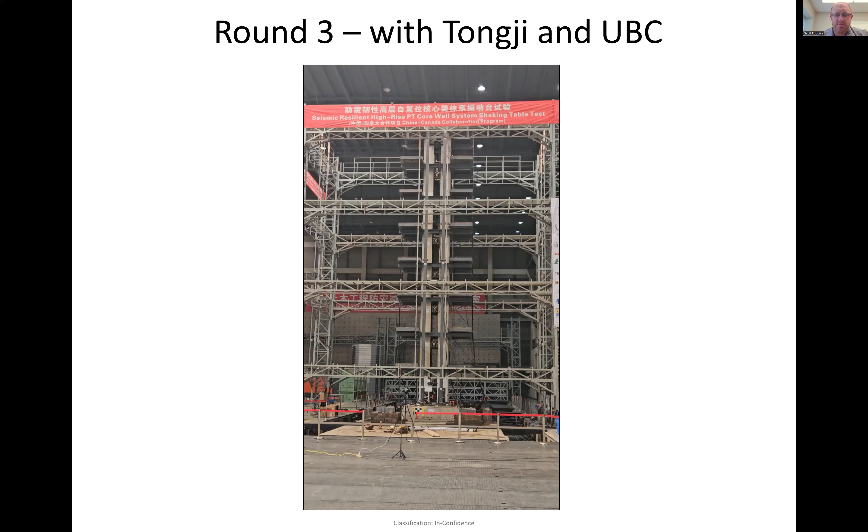That's an ongoing project, only a few months since we finished that testing. We're still going through data and pulling out the interesting aspects. But we saw some really interesting things in terms of that building responding as a coupled rocking core wall in one direction, and operating as an outrigger core wall in the other. It's subjected to many transverse unidirectional motions and also bidirectional motions.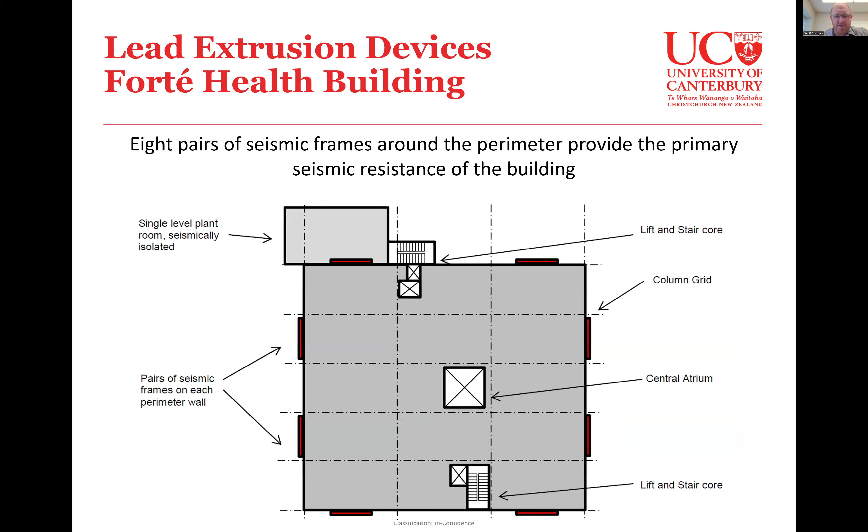We have seen some deployment of these ideas in Christchurch. This was a hospital rebuilt after the earthquakes, mainly built in 2012, 2013, and then opened in 2014. It had 8 pairs of rocking frames around the perimeter with post-tensioning, BRBs between the two walls, and lead devices between the rocking walls and the foundation.

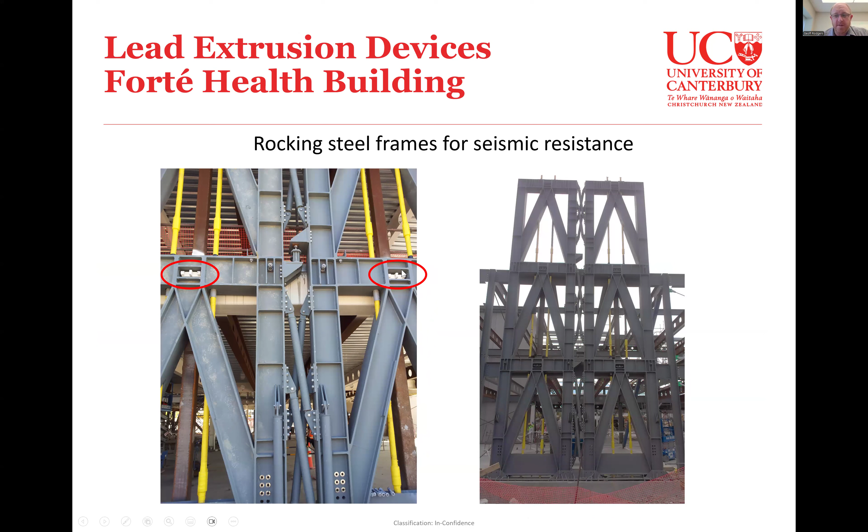These are the steel rocking walls that were applied. They sat within a steel shoe to provide shear resistance, and then they were vertically isolated from the beam to prevent any floor hogging or floor uplift issues as they rocked. So that was one building.

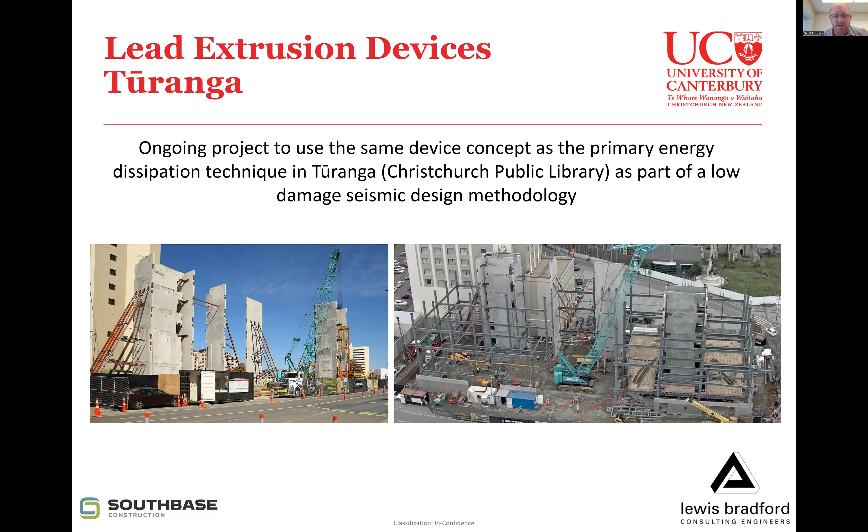There's also the Tūranga, which is the Christchurch Public Library. They had a reinforced concrete core, a steel gravity frame, and rocking walls that actually independently rocked in the two transverse directions. So they weren't directly coupled to each other in the orthogonal directions in those cores. There were also lead extrusion devices mounted between the wall and the foundation.

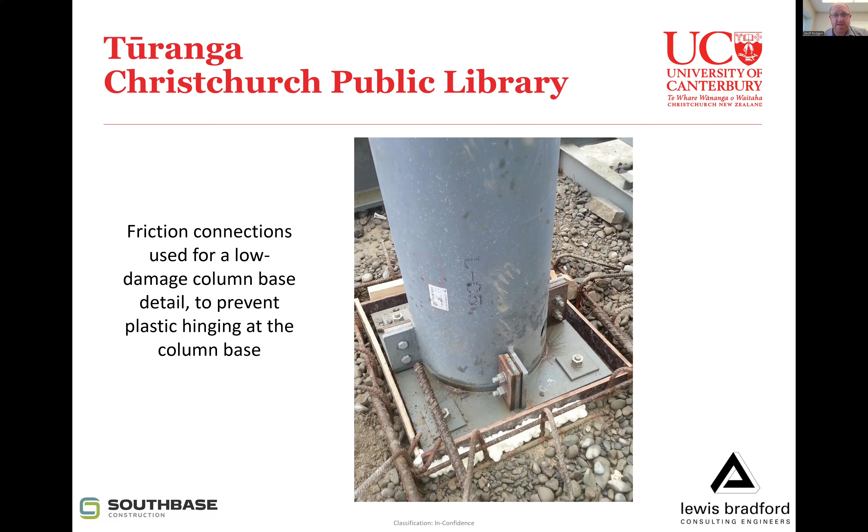One of the former PhD students at University of Canterbury developed low damage base connections - looking at sliding friction base connections at the column bases. Rather than having a hinge form by yielding the column, it was actually having some controlled rocking motion in the column. That was his PhD, and then he went on to apply that as a design engineer for this building.

There were also U-shaped flexural plates between those two orthogonal walls and the core, and then lead extrusion devices between the rocking wall and the foundation. So that was the building there that lit up in the evening.

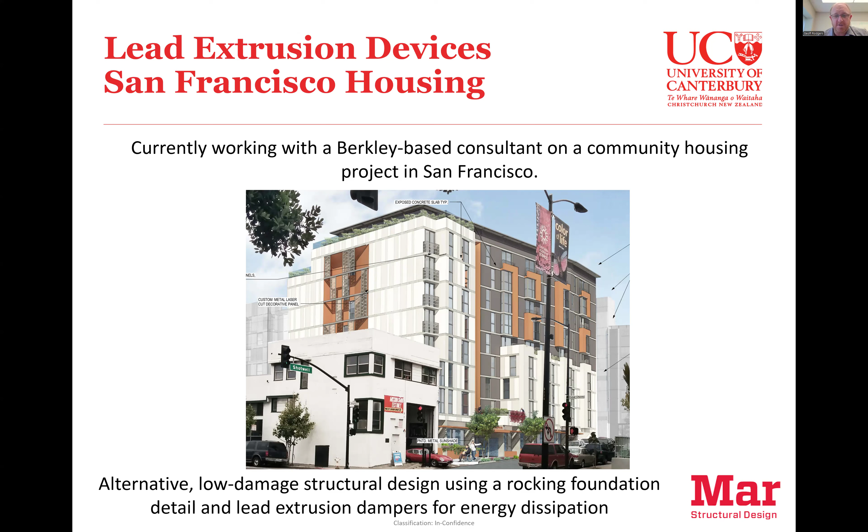Finally, one other building that used the lead extrusion devices was a low damage structure in the Mission District of San Francisco. This was a building by a community developer for formerly homeless people and those with below half the average median income for the region. The idea being, while we talk about resilient buildings, we often think about a server farm or a hospital or a really high value critical asset.

I was fortunate to work with David Mar and his team at Mar Structural Design. His thinking was that for some of these people, they don't necessarily have a great deal of resilience in their personal life. If they have been formerly homeless, they perhaps don't have a great support network around them. This was about trying to compensate for a potential lower level of resilience for the people by incorporating a higher level of resilience into the building.

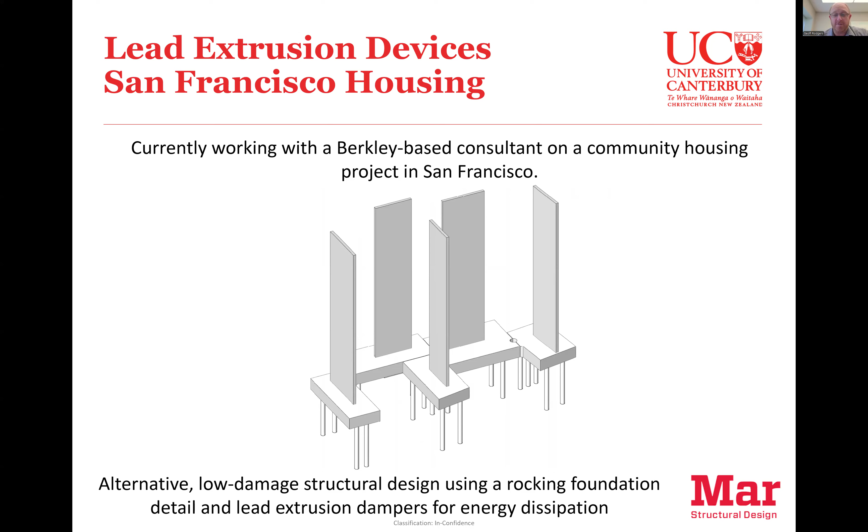This had some rocking walls throughout the building, and instead of rocking between the wall and the foundation, they actually rock between the foundation and the pile cap. So it's just moving the rocking a little bit lower. And this was the sort of conceptual design.

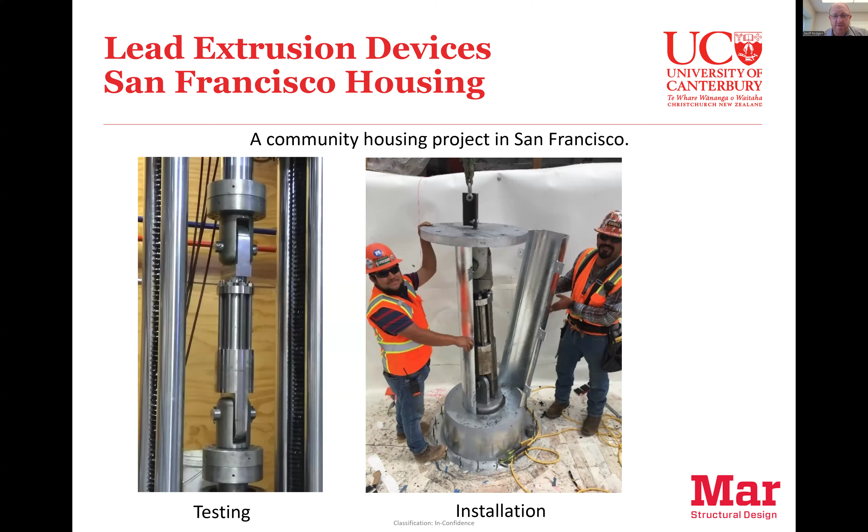The dampers were mounted, anchored to the top of the pile cap at the bottom and then into the foundation at the top. And then this was the final building here. So that was actually off.

It was on a very tight budget because it was a community housing project, but that amazingly did actually get a gold rating by the US Resiliency Council for that work.

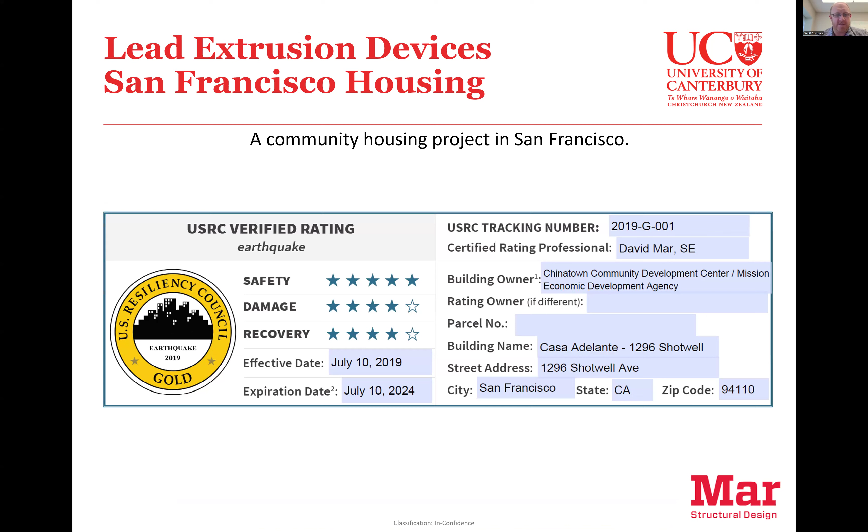So I guess that concludes the talk. I've been very fortunate to have worked with some amazing people and some great practitioners on a few different projects and contributed my small piece to that. So maybe if we conclude things there and have a little bit of time for questions.

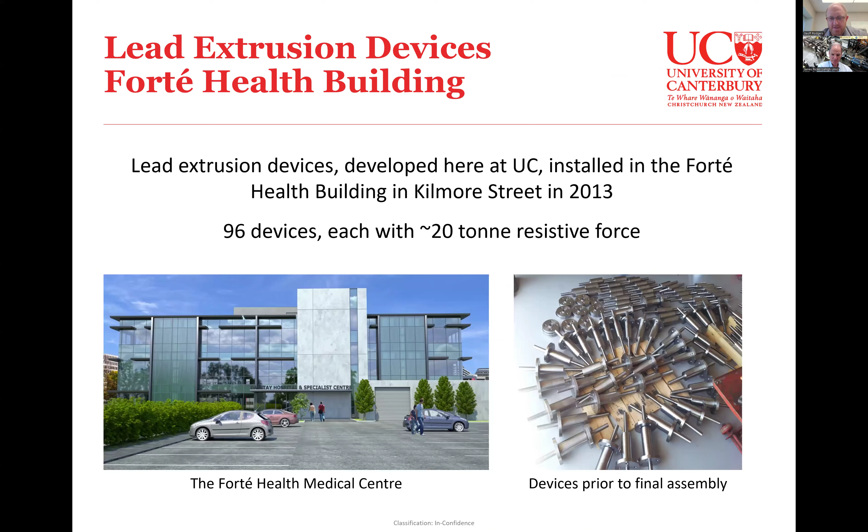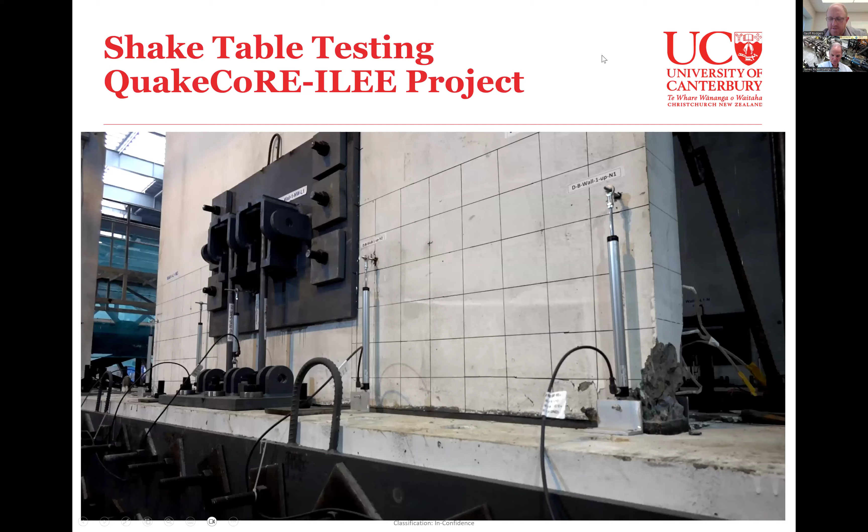So if I run back through the slides quickly—this is the longitudinal direction, you can see there's just a steel plate at the bottom and then it goes into the reinforced concrete. But if we go back a couple of slides, this is the transverse direction—there are actually vertical steel plates up the outside of the wall.

So we put a much more heavy level of armoring on the transverse direction and a lighter level of armoring in the longitudinal direction, because we weren't necessarily just trying to get a perfect outcome—we were trying to determine: if you just go to a really conservative design and armor everything heavily, you can get quite good behavior. But the challenge thrown by the industry advisors was to not just come up with a design that's really conservative and works well, but to try and figure out how conservative do you need to be and still get reasonably good response. So that was why the two orthogonal directions used different levels of armoring, to see how well that worked.

Mhm, okay. I guess what caught my attention too, since no one else has any questions, I have a few more on that rocking wall. What was that, 10 stories that was on the shake table with the outrigger system?

Yeah, it was actually nominally sort of a 30-story building, scaled down to one-fifth scale. But getting 30 individual floor slabs and mass blocks in there was just becoming too complex, so essentially every three floors was lumped together into a single mass block.

So for the support frame, was the only gap opening at the base of the wall, or was it segmental along the height of the wall as well? There were two sections to the wall, but that was basically a shipping consideration because the wall was constructed in Canada and then shipped to China for the test. Those wall sections were welded together with a steel plate at the interface, rigidly welding them.

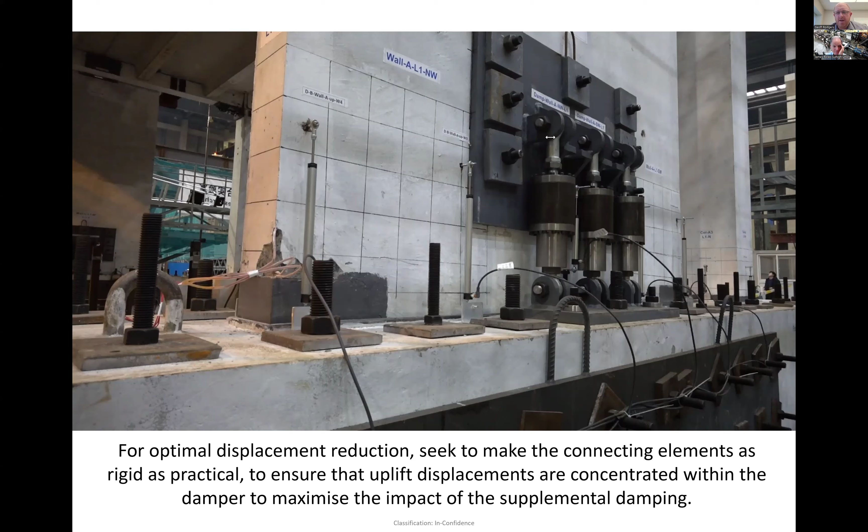There were also other things - if I go back into the building here, in the transverse direction we had dampers installed at the wall base, and then dampers at the slotted beam connections, the slotted beam-to-column connections. We had dissipators at the wall base dampers, but also at the beam-to-column and beam-to-wall connections.

In the longitudinal direction there was a larger number of dissipators, but the yield force on the dissipators was higher in the transverse direction to counteract the lower number of them. So there's quite a lot of differences between the longitudinal and transverse directions. There were essentially 16 beam-column or beam-to-wall connections in the longitudinal direction, and only 8 in the transverse direction total - but all the dissipators had different force capacities to try to accommodate for that.

So it's a more complex answer - we aimed for the same total amount of damping in the two directions, but there's a lot of moving parts in that comparison. Probably the biggest thing was that the level of overstrength relative to the design prediction was much lower in the transverse direction with the isolated walls than in the longitudinal direction with the coupled walls. Consequently, the displacements were larger in the transverse direction.